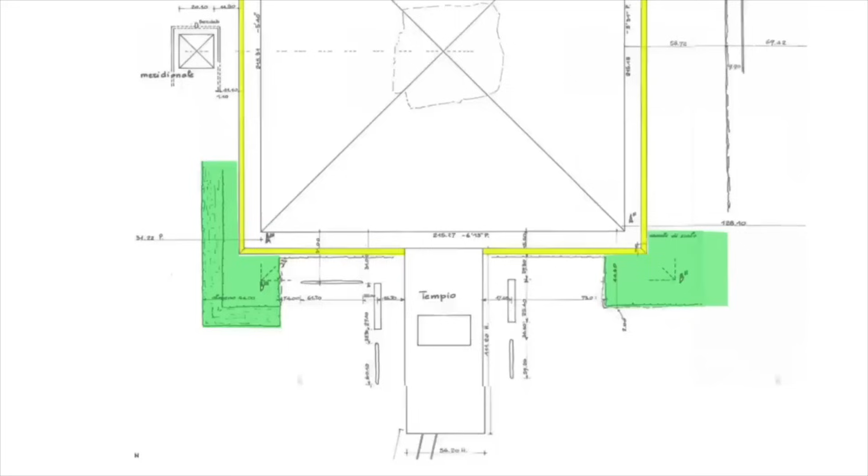This is M&R's plan diagram of the Khafre Pyramid, with the enclosure wall coloured in yellow by Hamilton. This wall is believed to have been 8 metres high and 3.14 metres in width, and there was a paved courtyard between the wall and the pyramid. But M&R highlight 2 massive piers or terraces that extend beyond the northeast and southeastern corners of the pyramid. They're built from massive blocks of limestone, with the limit of the northern terrace merging into the northern quarry face. The southern terrace is less well defined and is apparently somewhat decayed today.

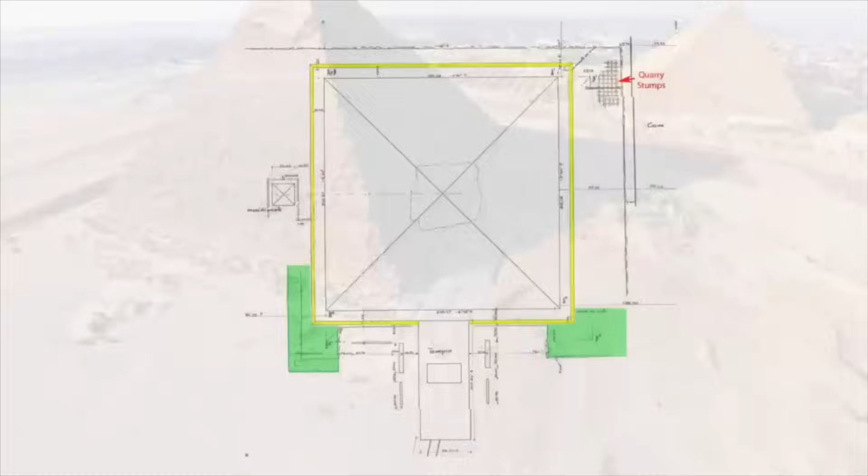Nobody knows the reason these massive terraces were built, but M&R suggest that this pyramid was planned to be much bigger, and these terraces were created as foundations to support the pyramid masonry that was set to be laid on top. So, a larger pyramid could explain the strange terraces, and it could also explain the 2 entrances into the pyramid. As we know, there are 2 ways into the structure, both of which are on the northern side, one of which begins in the paved courtyard away from the pyramid in the ground, and the second is on the northern face of the pyramid itself.

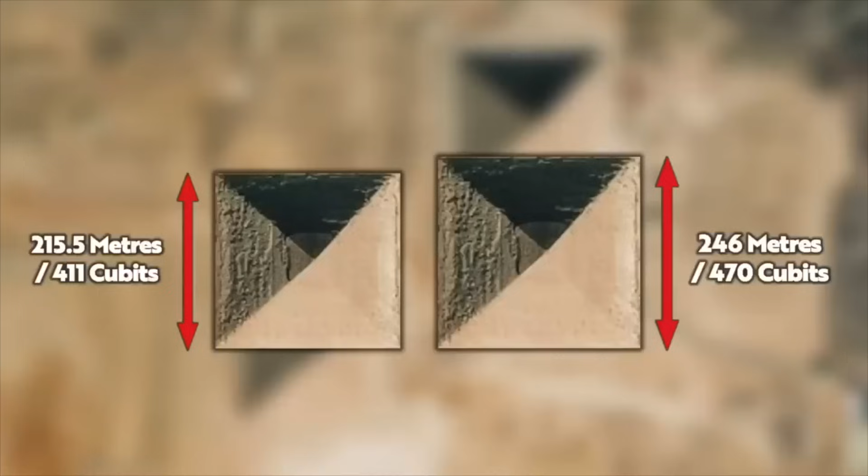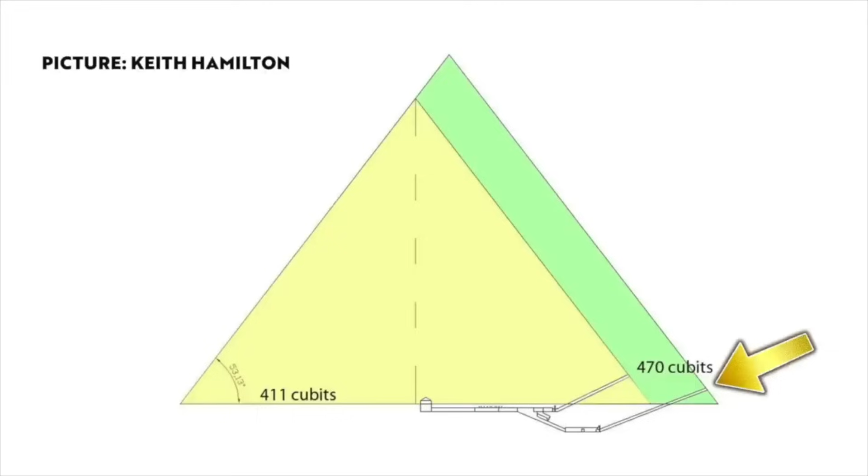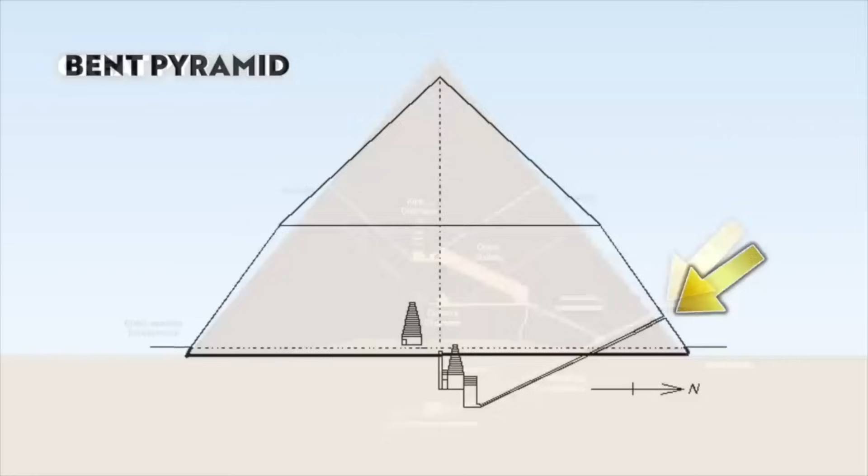Both of these entrances are placed around 12.45 metres or 24 cubits east of the pyramid's north-south axis. If M&R's hypothesis is correct that the base length of the Khafre Pyramid was originally planned to be 470 cubits, the cross-section of the pyramid now looks like this, with the lower entrance now starting in the masonry, around 6.5 metres above the pyramid's base. For reference, the entrance to the Great Pyramid is 17 metres above its base, the Bent Pyramid's is 12 metres, and the Red Pyramid's over 28 metres.

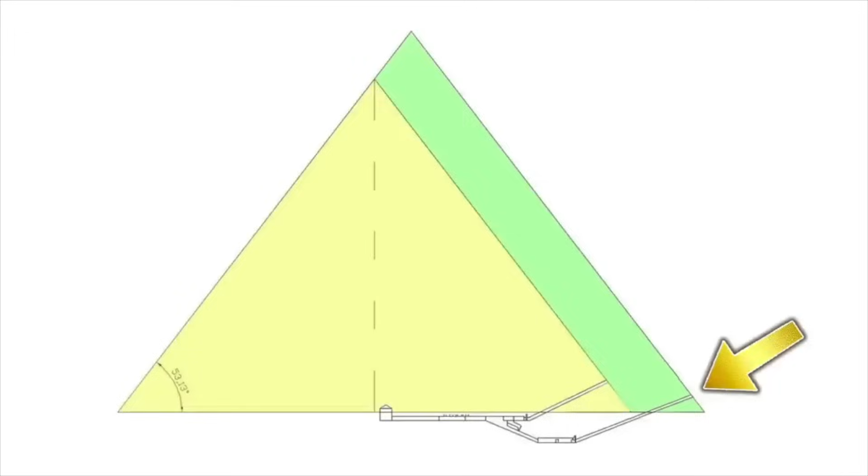So, being just 6.5 metres from the ground may seem a bit low for a major pyramid, but having a low entrance is not uncommon, as the entrance into Menkaure's pyramid is even lower, at just 4.2 metres above the base.

No other 4th dynasty major pyramid has an entrance at ground level, so a planned larger pyramid explains why we see it with Khafre's. It would have been the main entrance, and according to the hypothesis, the upper entrance was only created because the plan changed to a smaller pyramid early on, but after the lower passageway was already dug.

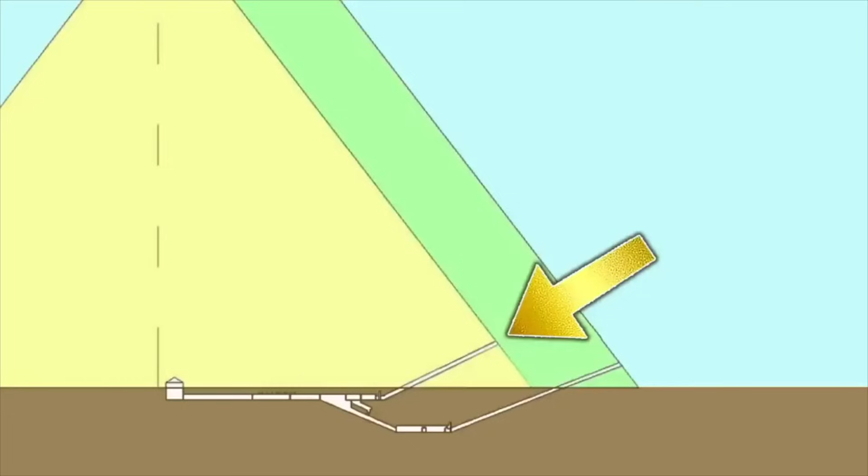Because of this change in plan, it's likely the lower entrance at ground level was not used, being plugged up and neatly concealed under the courtyard paving. But is there even enough room to build a larger pyramid? Well, when we look from the top, there is certainly enough room for a 470 cubit pyramid, and there is also enough room for a courtyard and boundary wall as well, and within the confines of the quarried area.

In fact, by having a larger pyramid, it means the distance from the northern quarry face to the northern wall would be the same as the distance between the western quarry face and the western wall. The positioning of the larger pyramid actually looks more balanced, more symmetrical. As it stands, with the pyramid as we see it today, there is a much larger space to the north.

Staying with this diagram created by Keith Hamilton, and on the smaller pyramid with a base length of 411 cubits, we can see that the entrances are displaced by 24 cubits to the east of the north-south axis. But when we grow the pyramid to have a base length of 470 cubits, the entrances are only offset by 5.5 cubits to the west, so they are much closer to the central axis.

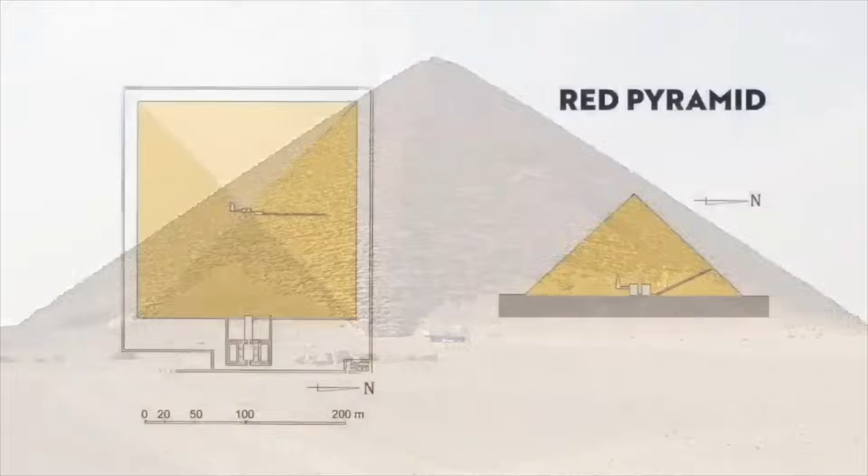To be perfectly centred, the pyramid base would have to be 459 cubits, and therefore you could argue that this was the original planned size for the pyramid. But saying that, we should note that Khufu's entrance was displaced by 14 cubits from the north-south axis, and the Red Pyramid by 7. So pyramids having their entrances on the north-south axis was by no means a standard in the 4th dynasty.

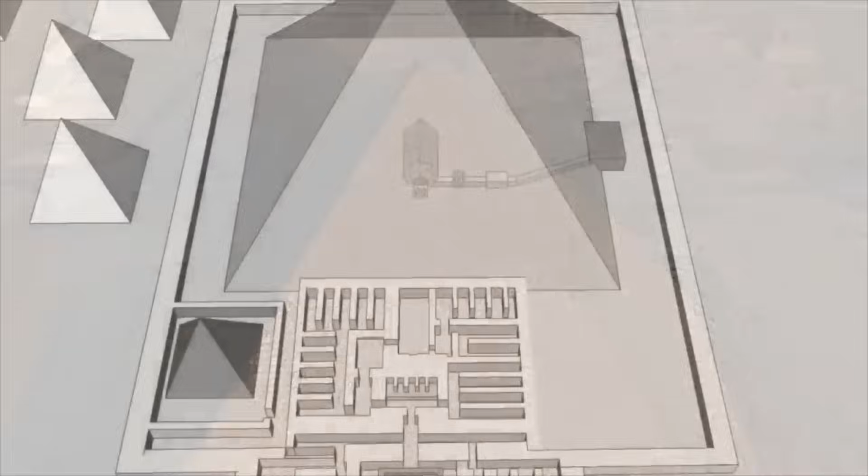So the evidence for an intended larger Khafre pyramid is limited, and it's by no means compelling, but it does seem feasible and maybe even probable. But for balance, you can explain away all the anomalies quite easily as well. For example, a number of 5th and 6th dynasty pyramids do have entrances in the ground, and not in the side of the pyramid. So this ground level entrance for Khafre's pyramid is not uncommon in pyramid building. Maybe it is for the 4th dynasty, but not for pyramids in general.

Also, the quarry on the northern side of the pyramid could well have been much closer to the Khafre boundary wall originally. Maybe during the pyramid's construction, the quarry itself was extended to the north, so that workers could have easy access to building stone. As we've seen already, the fact that the entrances are offset to the east of the north-south axis is not a reason to assume it wasn't planned that way, as the entrances to many major pyramids are also offset.

So evidence can be presented and countered, and at this stage there is nothing compelling, and so it's down to us pyramid enthusiasts to form our own opinions. But with my research into this topic, I did have another idea I'd like to present, that the Khafre Pyramid was actually a 3-stage construction project, a project that actually stopped at stage 2.

Before I get into the specifics, you may recall from my previous videos on the Great Pyramid that the most logical explanation for having 3 chambers inside, the subterranean chamber, the Queen's chamber and the King's chamber, was all down to contingency reasons. You start with the subterranean chamber, and if Khufu did die early, he could be buried below ground.

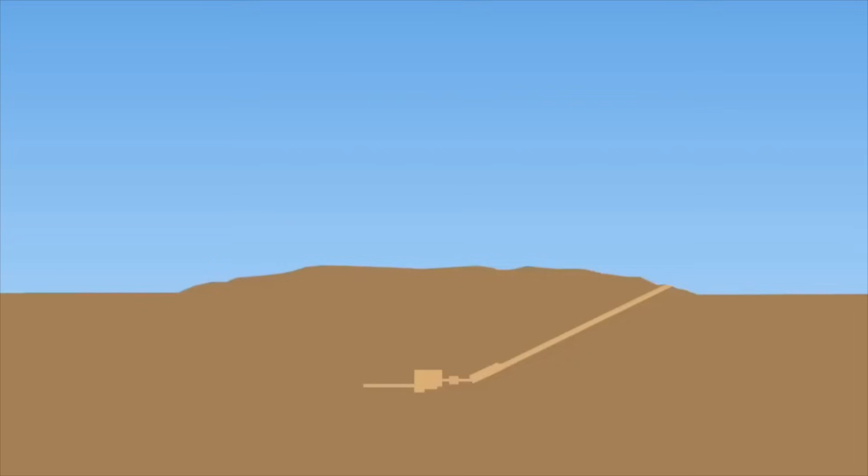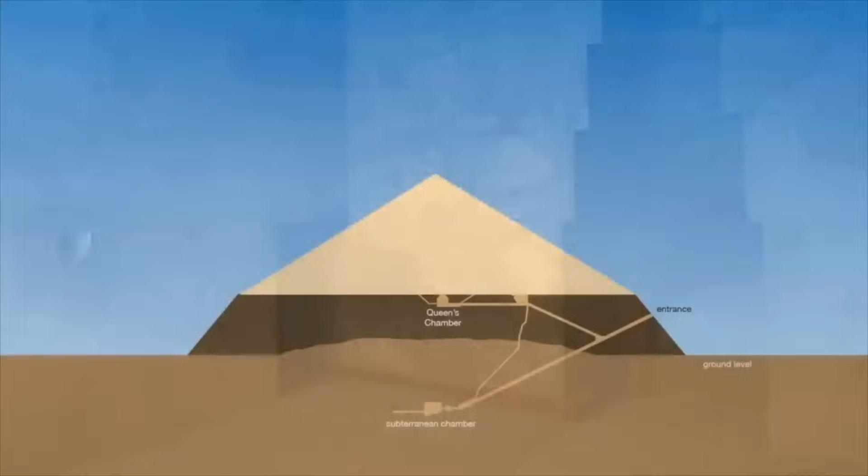Of course, this would not be an elaborate burial structure, but a small mastaba or very small pyramid could have been built over the top. But as the pyramid grew in size and the Queen's chamber was constructed, if the king died he could now be laid to rest inside that chamber, and the pyramid could either be quickly finished or even given a flat top like some kind of pyramid mastaba hybrid.

Khufu's master plan was elaborate, for a granite-lined King's chamber high up in the structure. If he lived long enough to see it complete, that would be his final resting place. That was the plan. But with the huge blocks of granite high up inside the structure, the King's chamber was a bold and brave construction project to say the least. And although the architect was clearly a genius, there was no guarantee it would work. But if it failed, or if Khufu died early, he still had the Queen's chamber to fall back on.

I assume that Khufu did live long enough because the Great Pyramid was completed, and I imagine he was laid to rest inside the King's chamber, leaving the Queen's chamber and subterranean chamber abandoned and unused, and in the case of the subterranean chamber, unfinished. So if Khufu did build his pyramid so strategically, why wouldn't Khafre and also Menkaure follow suit? Well, I think it's possible they did, but in a slightly different way.

I can look at the evidence mentioned, and also look at the layout of the internal chambers and passages of the Khafre Pyramid, and offer my own hypothesis that his pyramid project had a construction sequence, which just like the Great Pyramid was for contingency reasons, in case the king did die early. The evidence is limited and circumstantial at best, I admit that, but I do think it's feasible.

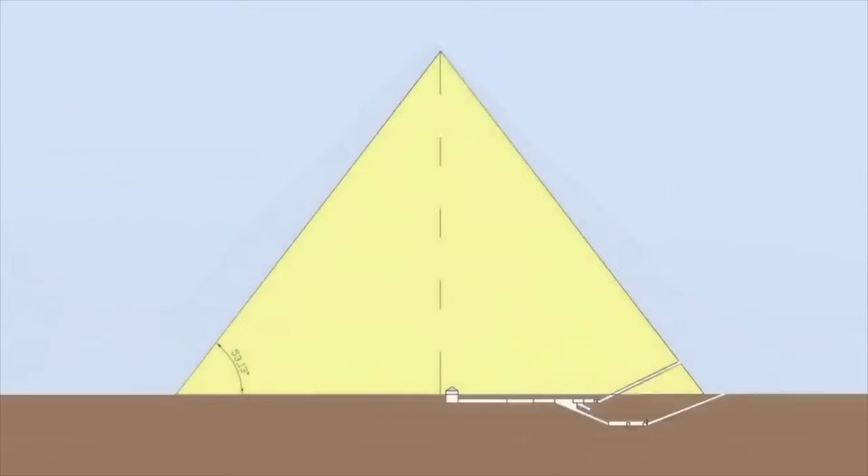Like with the Great Pyramid, at the start of the Khafre Pyramid project, they began by building a subterranean chamber, this chamber, known today as the lower chamber. This, in my opinion, is Khafre's contingency burial chamber. It's large, has an east-west orientation like the main burial chamber, but is actually quite rough and looks to be in an unfinished state. Flinders Petrie noted the poor state of the ceiling. It's like the work was begun and then abandoned, with the coarse workmanship still on display today.

I think that this chamber and also the lower descending passage, which was discovered in 1837 and was found to be plugged, was phase 1 in Khafre's burial monument. And if the king was to die early, a small pyramid or mastaba could be built over the top, and the king would have an acceptable yet unspectacular burial structure.

But whilst this chamber was being cut from the bedrock, or just after its rough form had taken shape, work began on the main burial chamber, which was always planned to be the final resting place of Khafre. The pyramid builders joined up this chamber to the underground system of passages, and as they began to build a pyramid over the top, they also built a second passage through the masonry. That's because I think it's possible that the Khafre Pyramid we see today was actually phase 2. An enormous pyramid, yes, but not the completion of Khafre's master plan.

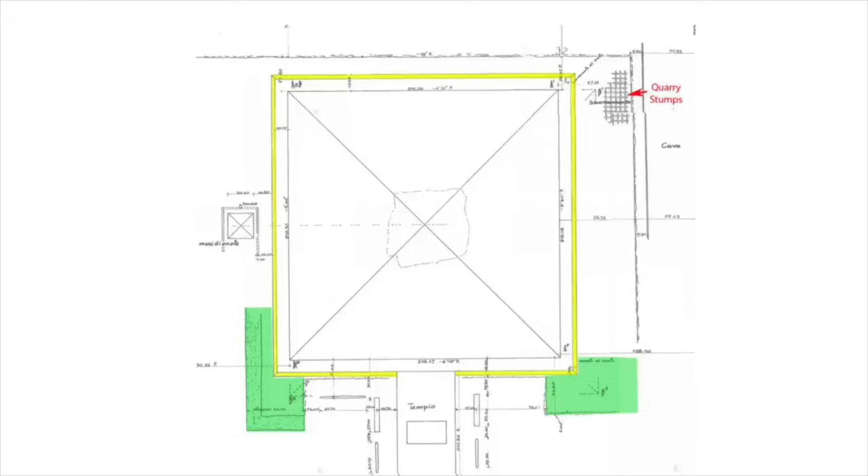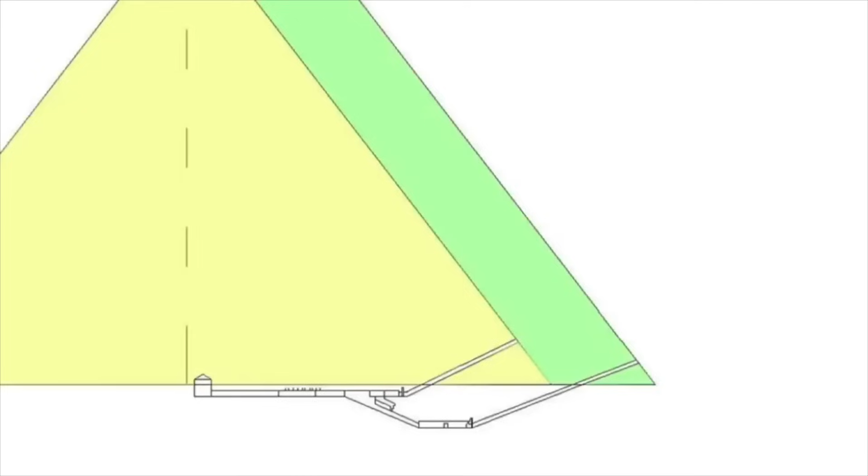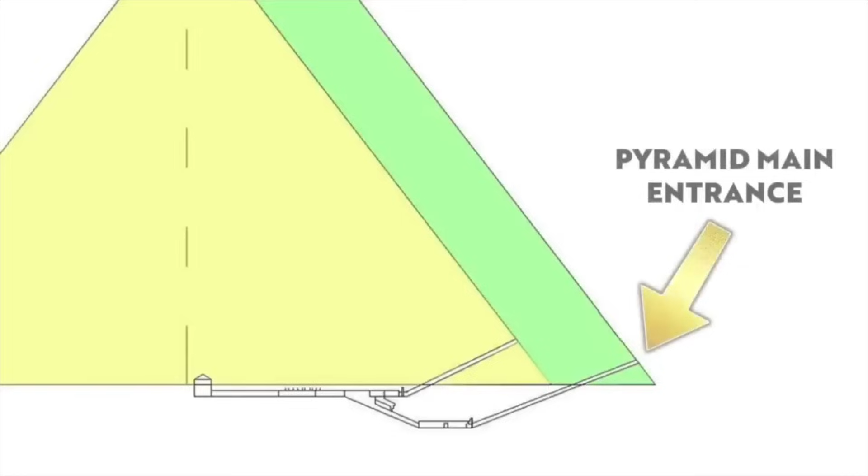The foundations were already laid, the passages were already cut into the bedrock, and so what was left to do from phase 2 to phase 3 was to add more masonry onto the northern and eastern sides of the existing pyramid. If the larger phase 3 pyramid was to be built, the upper entrance would have been closed off and lost inside the pyramid masonry. The lower entrance would be extended so it opened up 6.5 metres above ground on the pyramid's new northern face.

For reasons I can only speculate to, the decision was made to finish the project early, and if it wasn't already, the Phase 2 pyramid was cased. Maybe Khafre had died. Maybe his health was going downhill. Maybe there was a financial or labour burden. Maybe the powerful priests at Heliopolis opposed the extra cost. Or maybe the foundations were just not strong enough, and if the pyramid grew in size, there was a genuine fear of collapse. I don't know and could never know, of course.

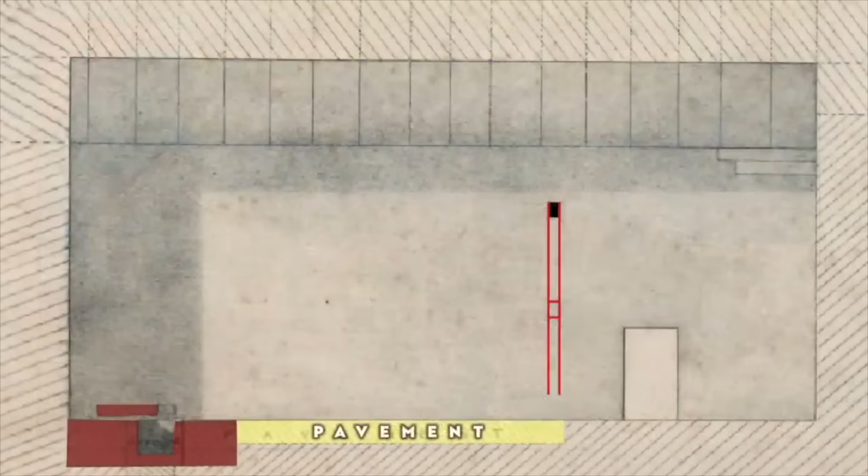But we should also note what I presented in my last video, which I've linked below, that the Khafre burial chamber was also never completed. The planned partition wall was never erected, and red construction lines were still seen on the walls in the 19th century. So, there is good reason to assume the king died early, or maybe his health started to go downhill, and that was before the pyramid project was complete.

So, in my hypothesis, Khafre stopped at Phase 2. They closed the lower portcullis, the lower passageway was plugged up with limestone blocks, the courtyard was paved, and then a perimeter wall was erected around it. Only an architect would know the pyramid was shorter than Khufu's. We're only talking a few metres, and to the untrained eye, Khafre's pyramid did look taller anyway, because it was built on higher ground and arguably in a more prominent position on the Giza Plateau.

If all Khafre really wanted to do was show off his strength and power by building a pyramid larger than his father's, well, technically he didn't have to go into Phase 3, because it looks like it was mission accomplished. No further stonework was done in the lower chamber, although it was plastered, and was therefore likely used as a storeroom for the king, but the lower descending passageway was certainly closed off, as plugging blocks were found inside.

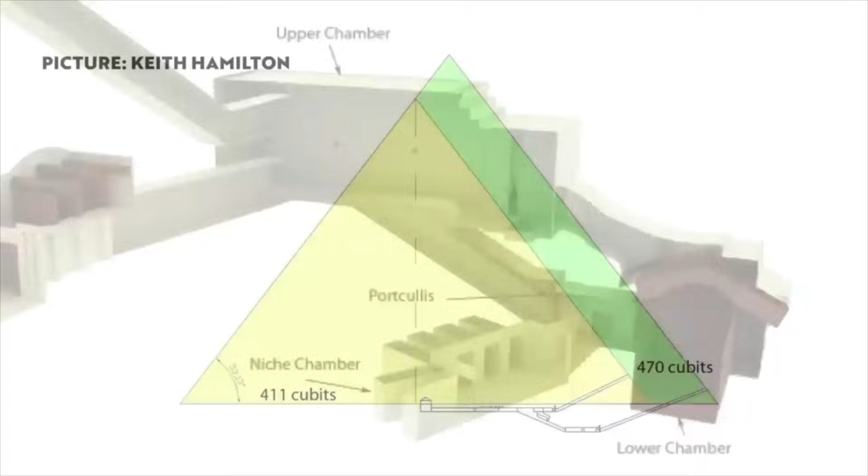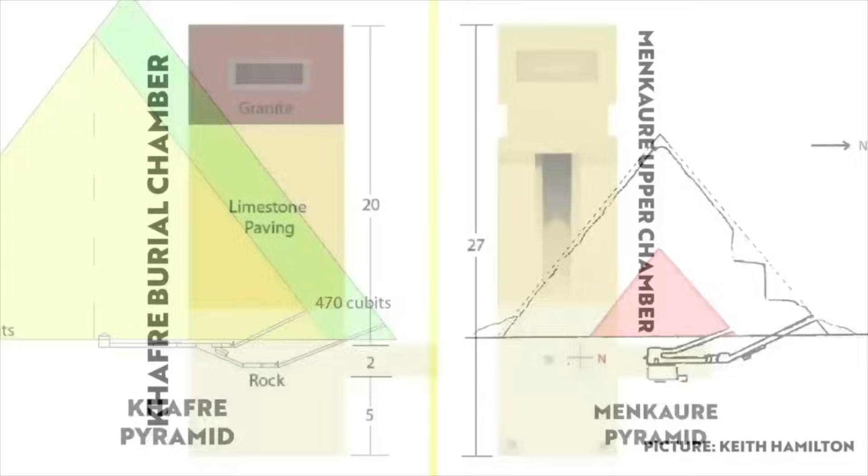According to my hypothesis, this is the first pyramid of Menkaure, an earlier phase in the construction process. Like this is the first pyramid of Khafre. If Khafre's pyramid project was completed, I imagine the upper passage would have met the same fate as Menkaure's, leading nowhere and becoming lost in the pyramid. In fact, by analysing Menkaure's pyramid, it could help us to understand Khafre's construction process.

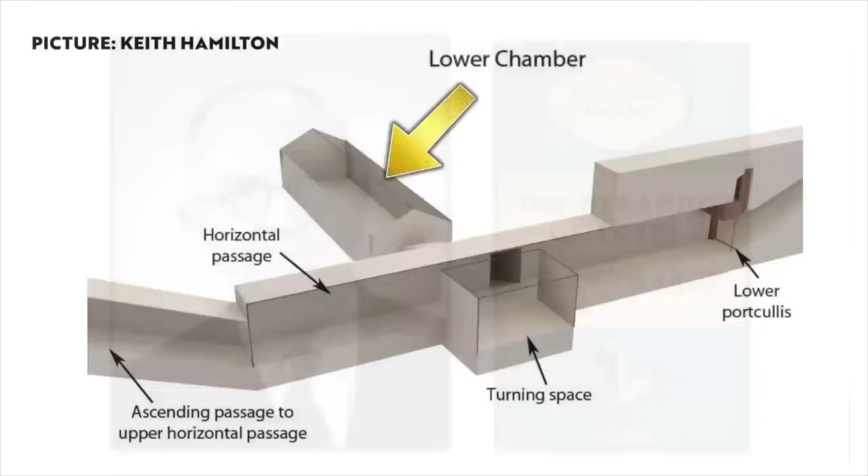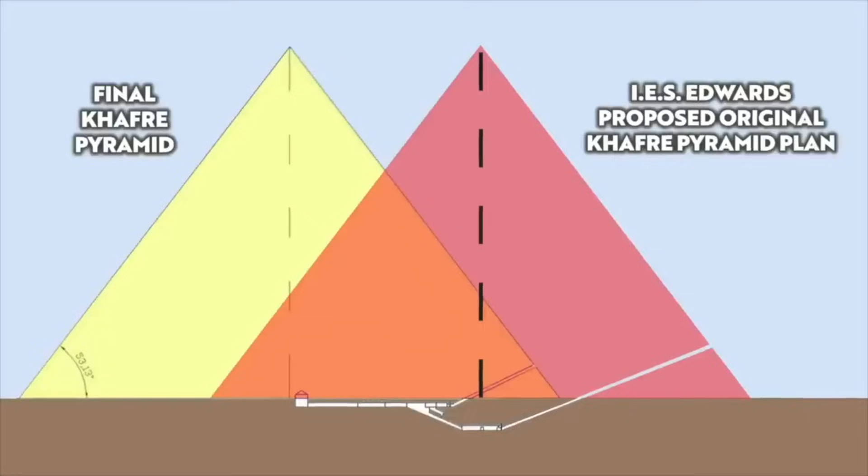It's also worth noting that the great I.E.S. Edwards suggested the lower chamber was originally planned to be Khafre's burial chamber, but he thought the entire Khafre pyramid plan changed, with the apex moving further to the south, and so a new burial chamber had to be constructed. I don't think there was a change in plan, but that it was simply built as a contingency, if the king met an early fate, or if the project ran into problems.

As you can tell, the idea I presented in this video is very much in an early stage of research, and I could find something that dismisses it altogether, and I'll keep you posted with how I progress. Ironically, sometimes the great thing about the pyramids is the lack of written information, because by looking at the stonework itself, it allows us to hypothesize and wonder. I enjoy problem solving, and although the Giza pyramids do pose many problems, ones that may never be solved, well, I certainly enjoy trying.